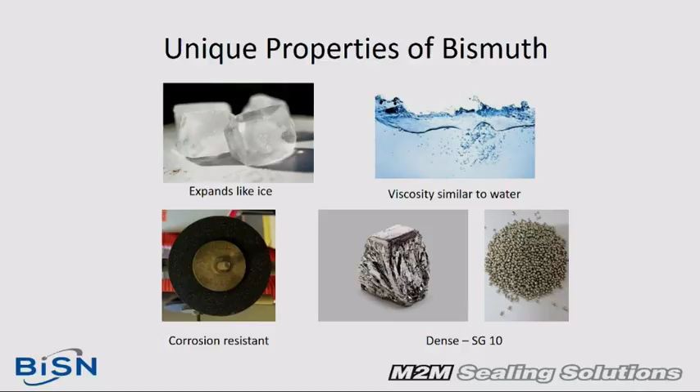So lastly, the biggest thing that makes it a good sealant downhole is it actually expands, unlike any other metal, when it solidifies. So if you think of water, when you put it in a freezer and the expansion of it, that's what creates a gas-tight metal-to-metal seal in the well. We take it downhole, we melt it, we control how it melts, where it melts, and then allow it to solidify and expand and capture that expansion to get a gas-tight seal.

So the idea of using bismuth is not new. Actually, the Schlumberger brothers in the 1930s applied for a patent to use bismuth for all the qualities I've just explained to you. What they were doing that did not quite work, and why everybody over the last 80 years has been unsuccessful doing so, is they were trying to use electrical heaters. Electrical heat does not generate enough heat to get it to melt, to flow in the well, to solidify, and to control that process in order to get the expansion you need in order to seal.

So we use a chemical reaction thermite heater, which is non-explosive. Again, it's run on electric line. You can run it in, and it takes 240 volts, 60 milliamps, just like a wireline set bridge plug or perforating gun. So no special requirements required.

All thermite is, if you're not familiar, is iron oxide, aluminum powder. So again, non-explosive, can be transported anywhere in the world via DHL, anywhere else. The resultant product of that is aluminum oxide, a liquid iron that turns solid, and then extreme amounts of heat. Again, we use that heat in order to start the melting of the bismuth and control the process.

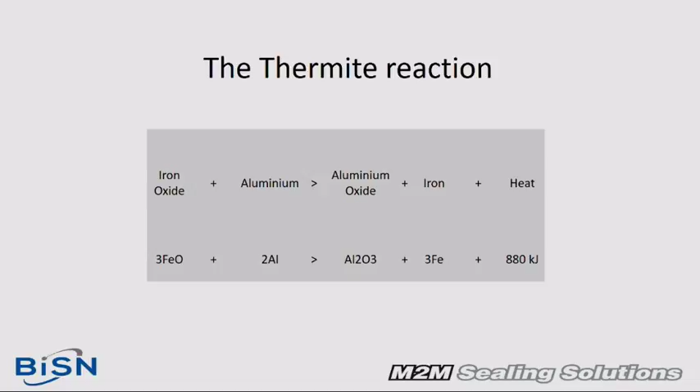So this is our Wel-lok M2M base technology. It can be utilized in many facets of the well in sealing, but what we use it for specifically in this is late life wells, trying to increase production in wells, and then decommissioning also, abandoning wells, trying to get a gas tight seal so that over the life of the well and after the well is done, you don't have to worry about going back and remediating the well.

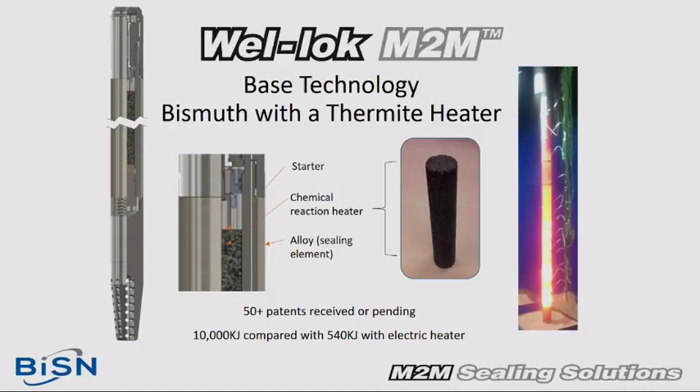So these are some of the tools that we do. Again, we have many products here that we've taken this technology and adapted to. For this specifically, we have the TS, which is essentially a Wel-lok bridge plug. So you take it downhole, you melt it, you create a gas tight seal. We have one that could be run inside tubing, run inside casing, depending on the size you need. It has a higher expansion ratio than conventional bridge plugs do. It has a higher pressure rating than your typical inflatable packer does, and it can be gas tested.

So we've gas tested these in week-long tests up to 5,000 PSI with helium. If you're familiar with helium, it's a very light element, and cement can't block helium, elastomers can't block helium, but ours, because of the expansion of the properties, will.

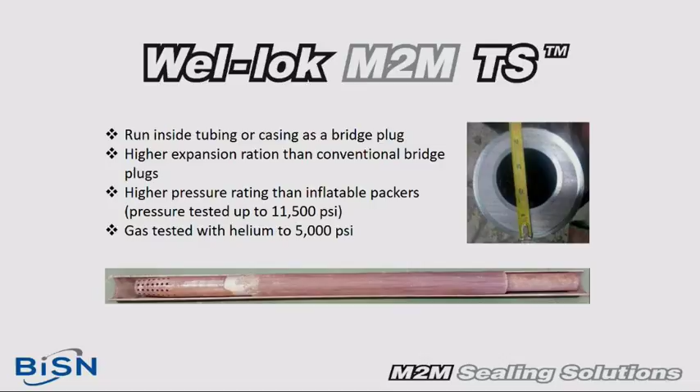This is a graph of a recent test we've set in offshore Norway. The scenario was they had a bridge plug and cement in the well. That blue line was a negative pressure test over a 2-day period where the well built up with gas pressure over 1,000 PSI, near 90 bar. The orange line was after they'd set our tool in the well, over the same 2-day period, and as you can see, no increase in pressure in the same scenario. That tool has been in the ground for 5 months now. They're doing a long-term study on it, and it's yet to build any gas pressure to date.

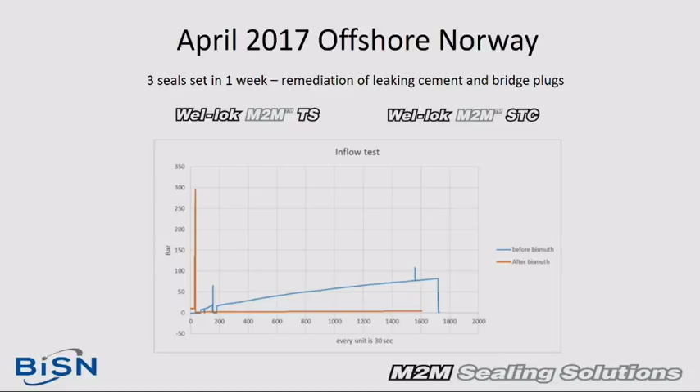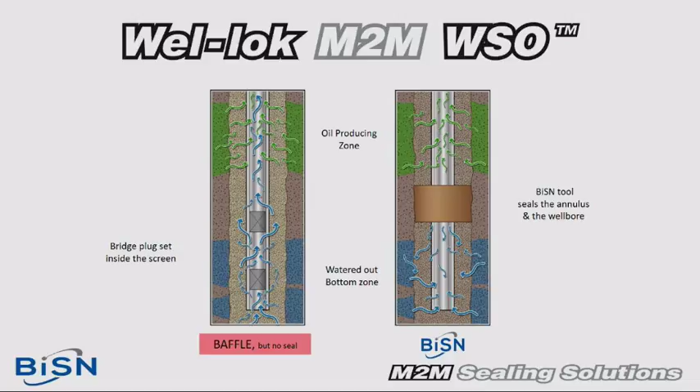As far as the late life of wells, trying to increase oil production, we were asked to look at this and see if we could shut off a water-producing lower zone of a well. On the left is the conventional method, setting bridge plugs inside the screens, baffling the flow, but not really stopping it from coming to surface. We were challenged to see if we could get our alloy to flow out the base pipe, out the screen, and then actually seal off the annular space as well, completely shutting off the flow of water from the zone rather than just baffling it.

Another one is our STC. This is something that can be run inside casing. It's basically replacing cement in the annulus to get a gas tight seal. So if you're looking at it as a balance plug, you can run this, perforate the casing or tubing as you would in a regular balance plug scenario, run in, melt the alloy, allow it to flow out the holes, and seal off both the tubing and the annular space.

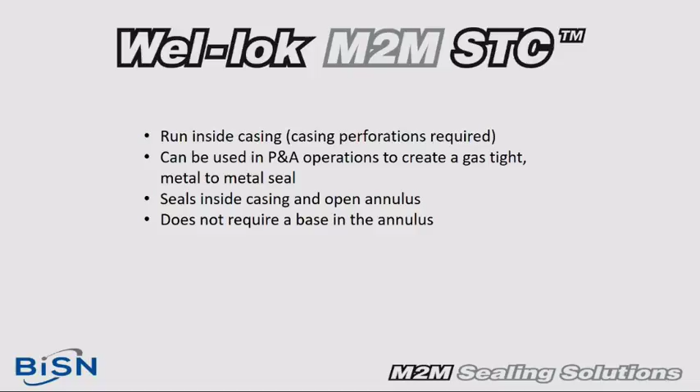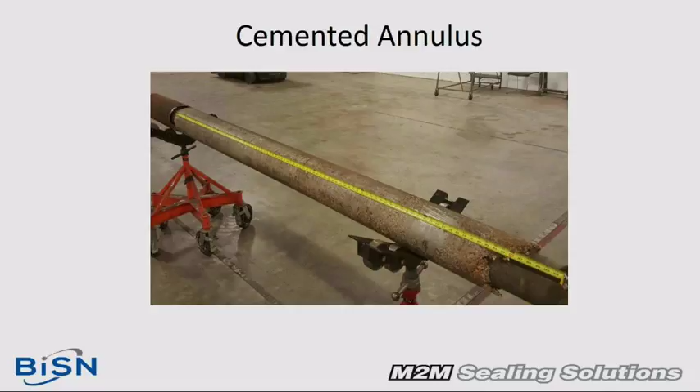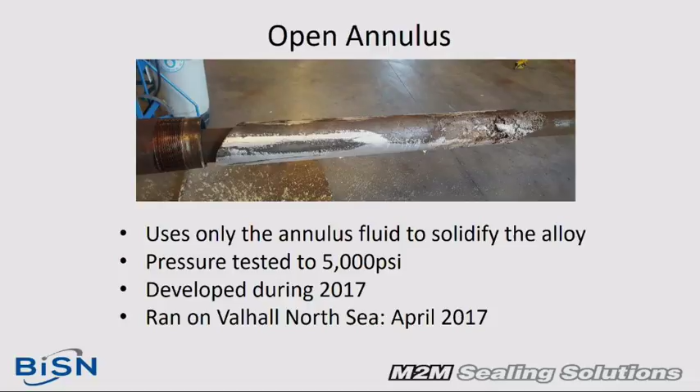This can be done in cemented annuli, as you see here, through microannuli and cement if you have sustained casing pressure in a cemented annulus. Or it can be done in a completely open annulus. On the right-hand side of that picture, that's where it forms its own base. Because it's a eutectic metal, it doesn't go through a gel phase, it goes from liquid to solid. As soon as it goes past its melting point, we capture that and ensure we have the right amount of heat with the wellbore fluid so it doesn't run down your well, giving you a solid seal. This particular one was also run back in April in the North Sea, and we pressure tested this one to 5,000 PSI. It was a 4.5 by 7-inch annulus.

And the final product I'm going to talk about is our MXD. This is for through tubing applications. You can run inside a small through tubing or restriction, and you can actually seal inside large annuli outside of the completion string, down in a lower casing.

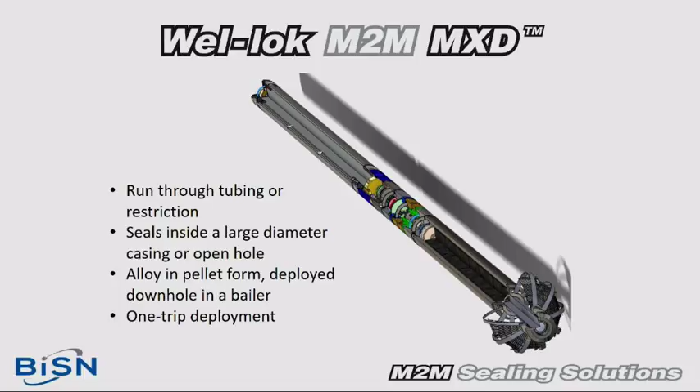We do this one a little bit differently. The other tools I talked about, we cast the alloy on the outside of our heater, run it in, and melt it. In this case, to get higher expansions and take more alloy down hole, we actually make it in a small shot pellet form. We carry it down in a bailer, run it down, open the bailer up, allow it to fall into our shot catcher at the bottom of our tool, and then activate the heater to create a seal.

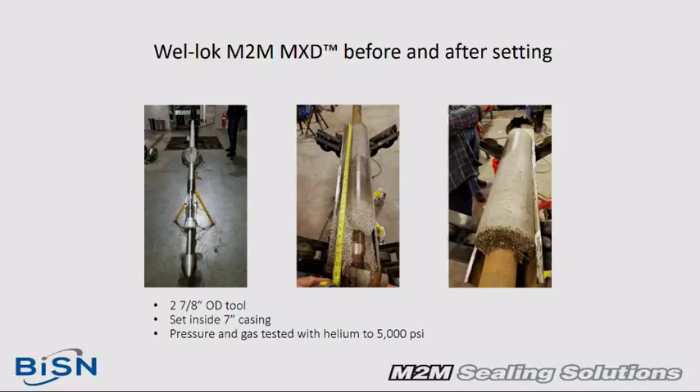This is an example of the first test we've done. This was a 2 7/8 OD tool. We set it inside of a 7-inch casing, and we achieved a 7,000 PSI hydro test and a 5,000 PSI test with gas.

Some new developments we're coming out with are larger sizes to handle larger well bores. We can actually take a 3.5-inch OD tool and seal inside of a 16-inch ID casing. We're also getting into removable heaters, which we ran our first test on today successfully. The reason for that is for basically NORSOK requirements, where you have to have a single material plug across all annuli.

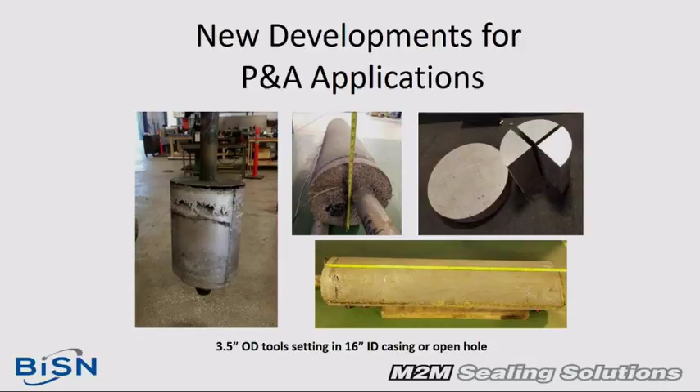And that is it. Any questions?

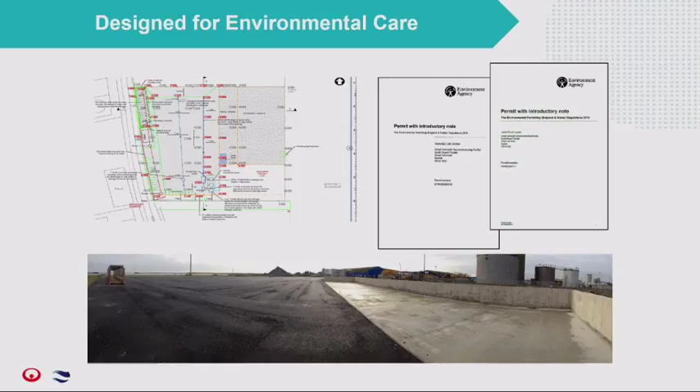We have the site completed at the end of 2016 together with Peel. In 2017 we had a stakeholder engagement where we invited, as well as the press, the local authorities and other companies within the Great Yarmouth or Norfolk area, because we're really focusing on using local content for the work we do. I'm going to take you to the project we did last summer together with Boskalis.

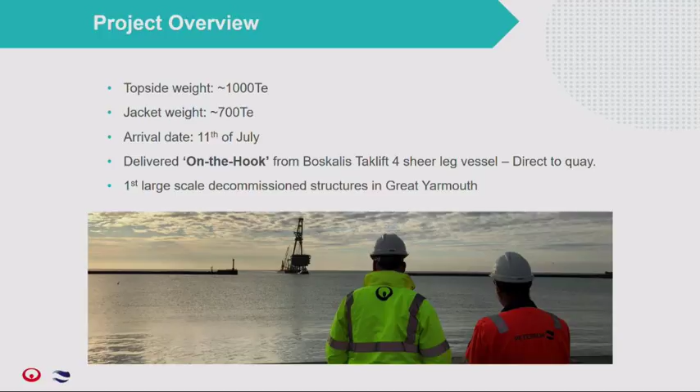This was a 1,000-ton topside and a 700-ton jacket. Arrival date for the topside was the 11th of July and the jacket about a month later. This is the first large-scale decommissioning project for Great Yarmouth, and it was delivered on the hook, direct to the quayside by the Boskalis Taklift 4. On the hook offers significant cost benefits because you remove the barge requirement, you remove the grillage requirement, you don't need to do sea fastening offshore, and you remove the barge loading onshore, which is a massive cost saving, but also you spend less hours offshore, so it's also a safer and a cheaper solution.

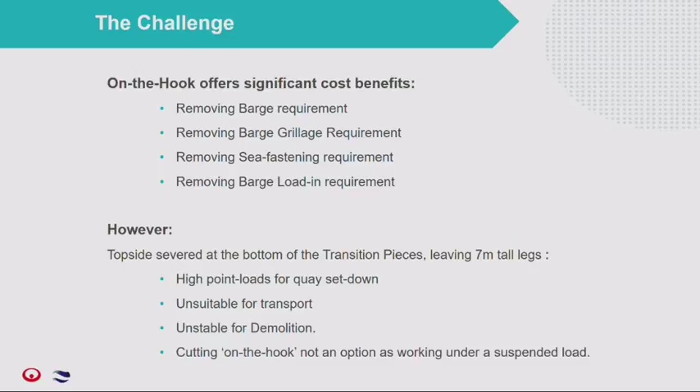There are a couple of points you need to take into account. The topsides are severed at the bottom of the transition pieces, which are 7-meter long tall legs. They have a high point load for the quayside, which is difficult to run with. It's unsuitable for transport onshore, and also unsuitable to do your demolition with during that. There's one safety issue: you can't cut the transition pieces on the hook because you then work under a suspended load, and that's a safety issue. So this is the challenge.

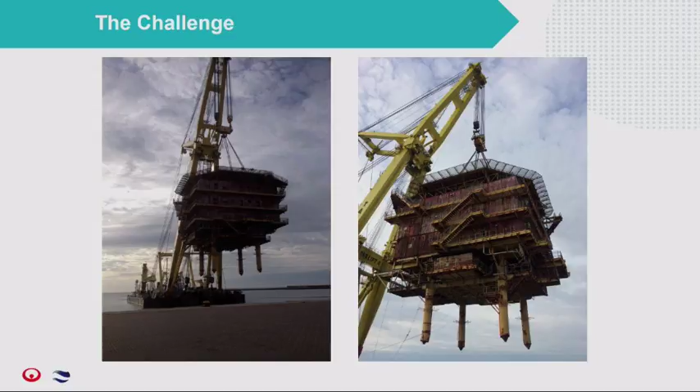The solution was to build a large level set-down tower to carry the load, a 1,000-ton load, and then cut the transition pieces from the top side. The challenges were the strength and the stability of the towers, the quayside loading spread. Also, there was a lot of camber on the quayside, not only this way, but also the other way around, so we really needed to level that. It's the structural strength of the topside itself.

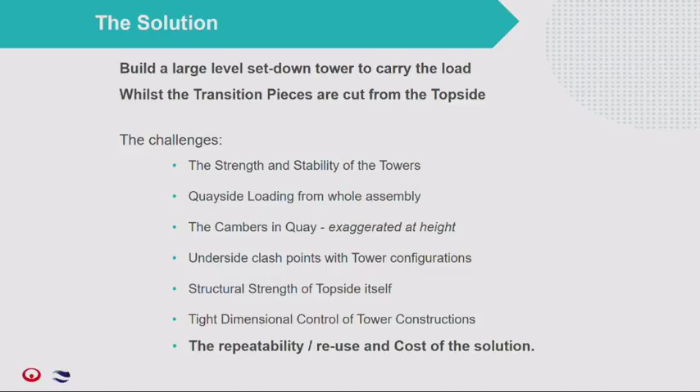But the most important thing was we needed to build something you can use repeatedly, because when you remove cost from offshore and add cost onshore, it doesn't make sense anyway. So this was our solution.

When you look at the picture, you see that it's modular built, and it's built from a decommissioned pipeline of the northern North Sea, which we transported from Lerwick up to Yarmouth. So this is really, when you talk about circular economy, this is circular economy. Local content, so local companies helped us cut the pipe in pieces and weld it with plates so that we can use it as a modular system, up to 7.5 meters.

Every block is 1.5 meters. So for all the next projects, we only need to know how long the transition pieces are, and we can use the system and build it fit for purpose for every project.

You see the layers. There is what we do with the load spread, and it is also how we fix the camber on the quayside so that it's leveled at 0%.

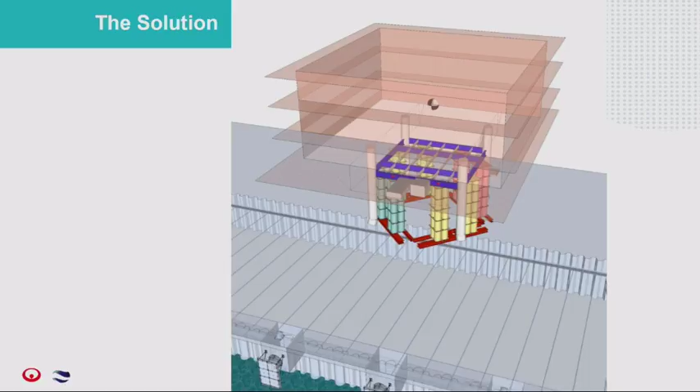Together with Boskalis, we had to do a lot of engineering from offshore. We have taken all the measurements from offshore so that we were able, we needed to know the center of gravity, the measurement, and where to place the towers.

Finally, we mounted grabs on our excavators, and we had some guys working from an extended platform with cutting torches, cutting the legs.

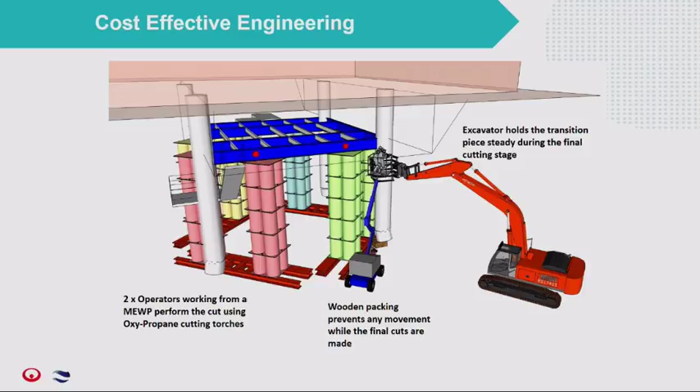So here is where you see the towers, and we don't paint them, because then you can see that it's circular economy.

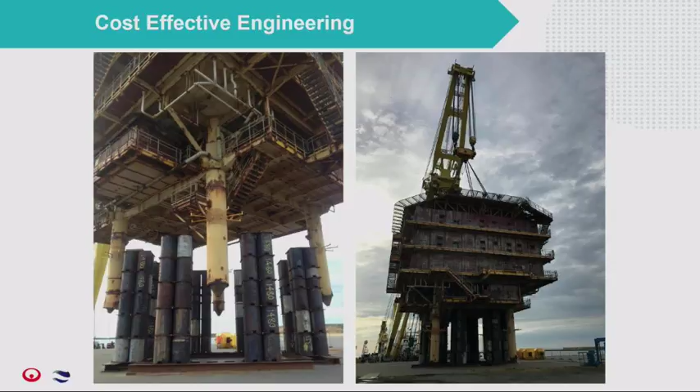And this is the cost-effective engineering. We just put it down, and when you see the small platform, it was only 2 centimeters from one of the pillars. So really the guys offshore and onshore did a lot of engineering work, and it worked out quite well.

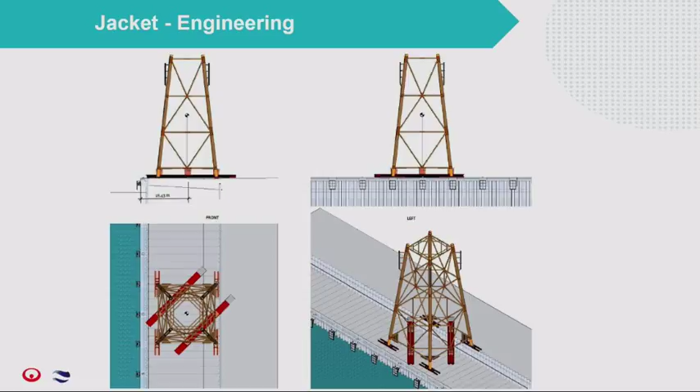We did the same with the jacket. We put it on the quayside and then moved it with our SPMTs to the decom pad, also using the modular system, but we only had to use one block. So with this, we think it's a faster, cheaper and safer solution, and it will unlock the potential for the UK Southern North Sea Centre of Excellence in Great Yarmouth.

That was 8 minutes not breathing.

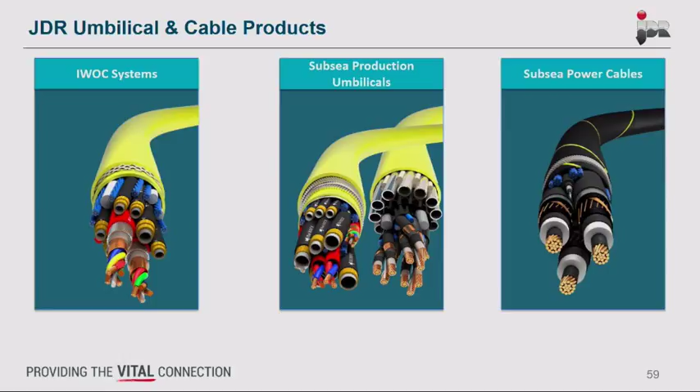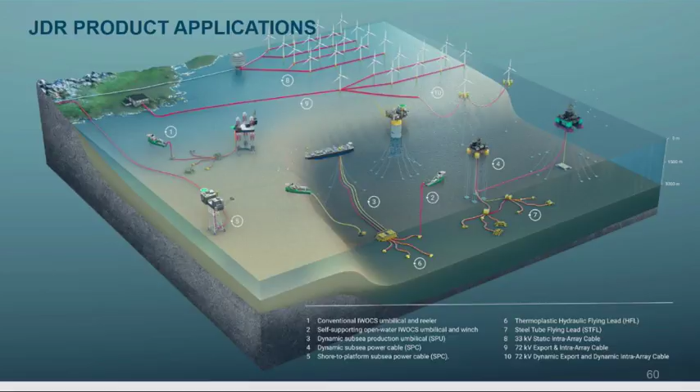So just a little bit about JDR before we talk about the project itself. We're a manufacturer of umbilical systems and power cable systems, so our roots are in the oil and gas industry, but today three-quarters of our turnover is actually in the offshore wind industry. Our products go from deep water, dynamic applications, up the continental shelf and into the shallow water where all the renewable activity is. As I was saying, our roots are in the deep water stuff, but more recently we've moved into the wind side. We have two factories in the UK, one in Littleport in Cambridgeshire, which was the original basis of the company, and the success of that facility enabled JDR to create a quayside facility in Hartlepool, which is now where a large proportion of our work is done. We also have a design office in Cambridge, which is where the product development group for the whole product range that JDR make is based.

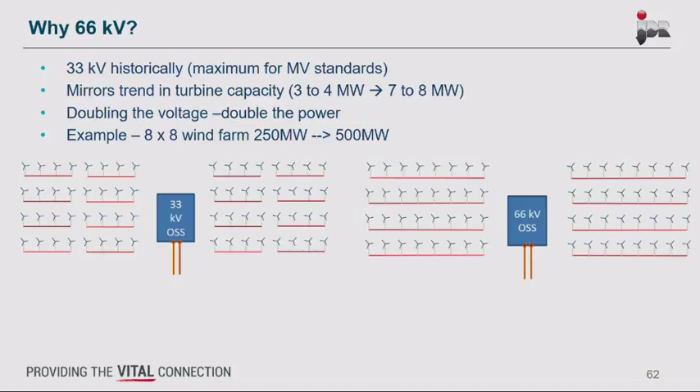So why 66 kV? Array cables have been 33 kV for many years now - it's the one thing that has been relatively standard. But as turbines have increased in size and the size of individual wind farms have increased, this has pushed a need for a greater level of voltage. If we look at the graphic on the left-hand side, this is a 64-turbine wind farm connected by 33 kV, and the right-hand side is by 66 kV. If I add in the cables connecting back to the offshore substation, you see that on the left-hand image there's a lot of length, and in the right-hand image we've reduced the number of cables right down. So this is really the primary economic driver of 66 kV - it reduces the length of array cables in a field between 20 and 30%, and simplifies the whole offshore substation layout.

But of course, 66 kV is a high voltage rating, not a medium voltage rating, so there's quite a lot of technology development required to step up the voltage. We didn't want to go to a very expensive, traditional high voltage mentality - we wanted to extend medium voltage technology up to high voltage, keep the cost down, keep the same manufacturing processes, avoid over-engineering, but at the same time we needed to demonstrate lifetime reliability through accelerated aging tests. So the design and development of this project was run from the JDR Cambridge office. Manufacturing was in Poland and the northeast of England, but there was good local content for the east of England too.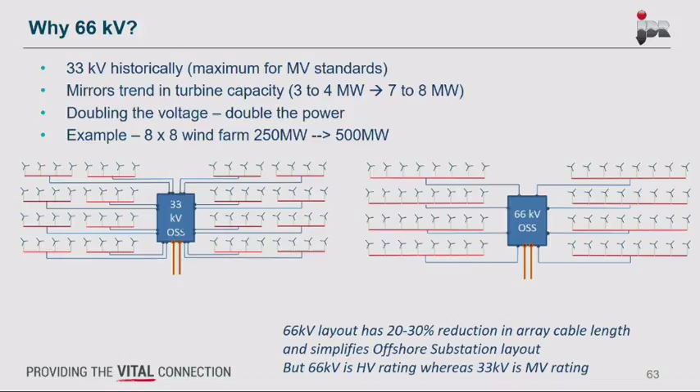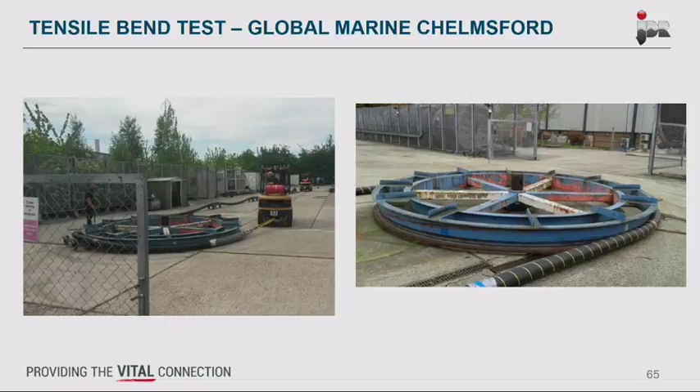Testing was completed in Chelmsford at Global Marine, the tensile test facility there. Another company who supported this is DNVGL out of Lowestoft, who coordinated third-party inspection throughout the whole process, both in the UK and in Poland. We also worked with the JDR Littleport facility, which was heavily involved in development.

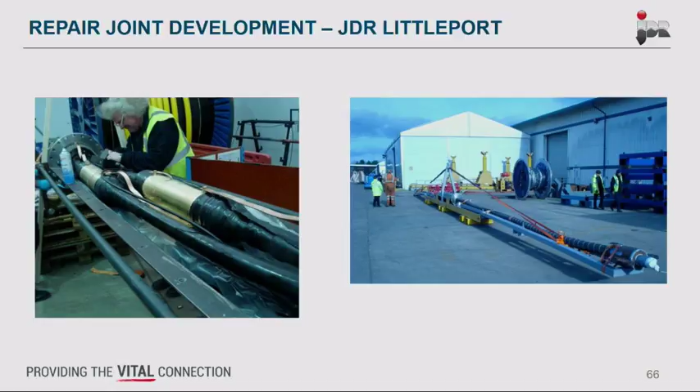Here we show a repair joint which was assembled and developed at JDR Littleport in Cambridgeshire, and the tensile testing for this item was done at Servitec in Lowestoft. Electrical testing was done up in Blyth in Northumberland, but that was again supported by some jointing technicians who came from this region.

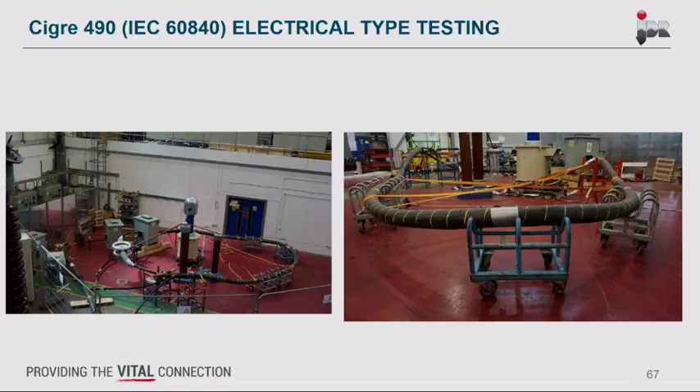Just as a few concluding points, we completed the technology development and full-size wet age testing last year. This has led to our first supply contract with Vattenfall on the Aberdeen Bay project. It's a relatively small project, but a very important one - the first 66 kV project for us. As I speak now, the first cable lengths have just completed factory acceptance testing.

The second supply contract has been the East Anglia 1 project, and you can't get much more local than that. That's a very significant, large project locally - 714 megawatts - and the production of those cables will be starting next year.

I should also add that the design is now ready and available for 66 kV floating wind projects. So this has been a great story of a successful development leading quickly into commercialization.

The local East of England content - the supply chain - has enabled this, and it will lead to future work both in and out of the region. So thank you for listening, and I hope that's been of interest.

Well done, you managed to do it within time as well. Congratulations. Judges, any questions? Hi, can you hear me?

Great presentation, thank you very much. Just a question - you talked about the things that were done locally. Can you give me a bit of a flavour of the kind of skill sets that you actually use from the local East Anglian market?

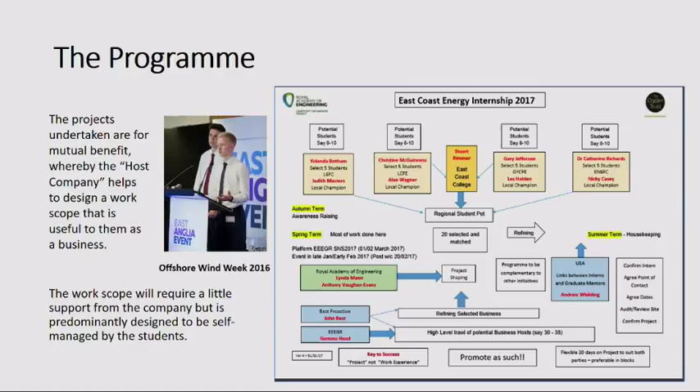The champions, which I think were really important in each of the colleges, two of which merged during the process, were the people and the interface with the students. Their intimate knowledge of their skills, what they wanted and where they were, was hugely helpful. I just went around and banged on doors, cajoled, challenged, was tenacious, and I found people that genuinely wanted to participate.

So we have the finances, we have the companies, and we are on our way to delivering an energy internship scheme. In year 1, we had 5 students. In year 2, we had 25, overall 30 students. Unfortunately, 3 didn't quite make the mark, but those 3 were individually mentored and talked with as an exit interview to try and understand where their challenges were. I do still think that a 90% success rate for a relatively new project is pretty impressive.

People always ask, well, what's the numbers? It's too expensive to train. Why should we train? Hang on. In 2017, at 20 days, that's 500 working days added through 25 students. If we took a broad salary of £20,000 and 20% on cost, we've added £50,000 into the industry over 2 months. If you considered that each of these students, in a way, was on an extended interview, it would cost you nearly £1,000 just to put an advert in the paper. So in round terms, I've said there's £75,000 worth of value added into the industry.

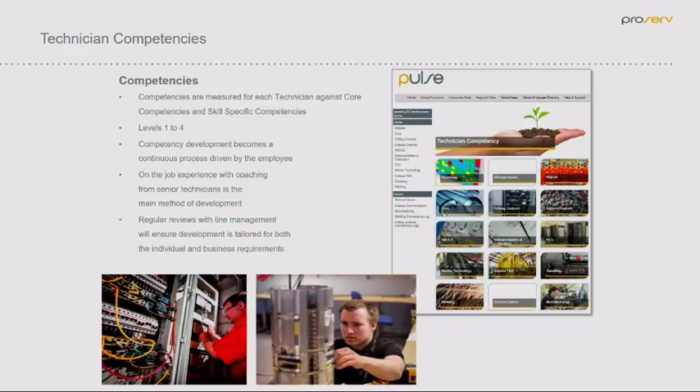They're able to monitor their own competencies. We set up this framework within the academy, and it's got all the tools there, with set levels where the guys can measure themselves and operate towards those levels, becoming competent in the skills that they know. So they know what they have, where they need to go, and how they can develop themselves. It's all part of them driving the process through.

This information is all open to them, so they can see what they have. This competency matrix has clear objectives, clear levels in which they can progress. Everybody works through this - not just our apprentices, but the entire workforce works through similar schemes. This one is for technician competency, but we do it in engineering as well, through several of these schemes.

When we get into engineering, we're not just looking for graduates. I'm a great believer that engineers can come in as great graduates, but also as people who have come from the shop floor, who have been offshore, who have had their hands on tools and really worked with this equipment through the apprenticeship schemes out of colleges, gaining their qualifications as they go to become engineers. So there are two routes into engineering - one very academic, and one very much vocational, based on the work people are actually doing on their tools with the products we're supplying.

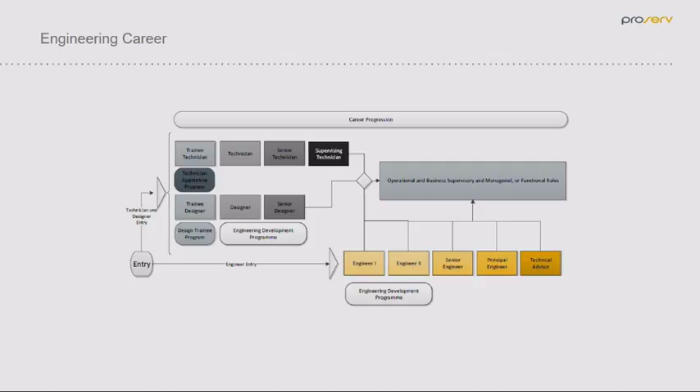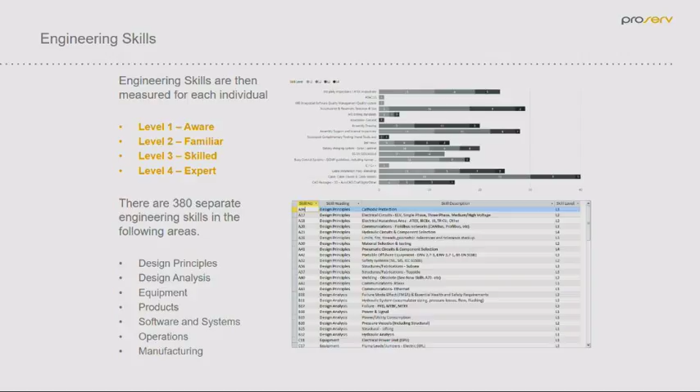With engineering, there are a huge number of skills and competencies which they gain. We're measuring the competencies again in engineering, and everybody can see this in these areas. They have a framework of competencies and skills where we're measuring nearly 400 different skill sets through a range of disciplines, so people can measure themselves, see how far they need to go to progress, and what they need to work to.

Finally, in leadership development - it's key for everybody who's working for us. We take this very locally, as a local passion, developing a local system within Great Yarmouth, where I'm based, looking not just at our leadership team but the whole group in what leadership skills we can bring to these people: coaching, regular performance reviews, and how we develop and bring them through to work within the group, mentoring people within their teams.

It's all about bringing people in at the base, developing them through the company, gaining their skills, giving them control of their own future and their own competencies, so they can clearly see how that's set out and how they can grow within the business and grow their skills for the industry.

So just a few highlights to finish with. Our apprenticeship scheme is well awarded, and we're really pleased about that. We've got a good share of the UK apprentices for Proserv in Great Yarmouth - 18 of over 50 apprentices currently working through their apprenticeship there. It's really great to see these young people develop through and work through the company, becoming engineers and leaders in their own right.

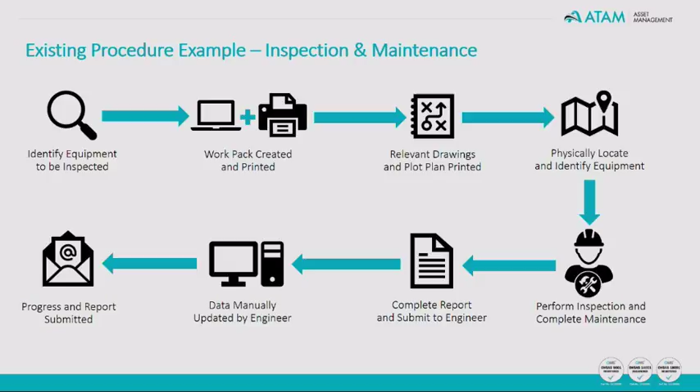The next slide represents the same procedure as previous, except this time utilizing our ATAM Asset Intelligence software. As you can see straight away, the number of steps has been greatly reduced. The work pack, instead of being printed, can be downloaded to the tablet. This can then guide the technician with the built-in GPS directly to the asset to be maintained. As the work is completed, information entered in the software, live field sign-offs, updates, and real-time reports are made instantly available.

These are instantly available and visible online around the world to supervisors, managers, and clients. The last step shown is automated, and the information is automatically shared via the cloud. This enables clients to see live status updates, productivity of their workforce, and real-time reports, allowing for total transparency.

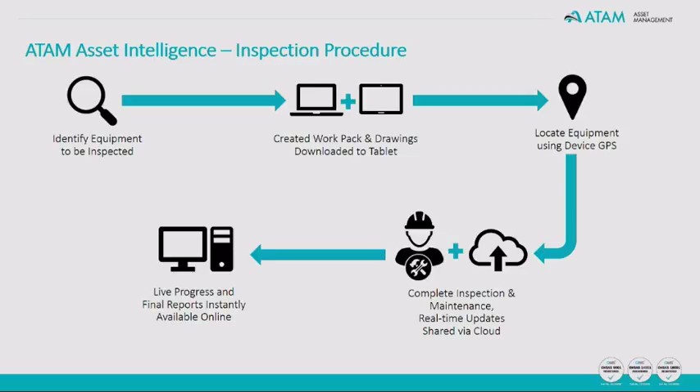We believe our solution offers the benefits we originally set out to achieve: increasing productivity, removing the repeated manual entry of information, and greatly reducing paper usage, which in turn saves cost and environmental impact. Further benefits can include reduced meeting times, streamlined handovers in the field, all whilst providing clients with live updates and a level of transparency never before offered.

Next, we come to the device feature. Some of you may be familiar. It's an intrinsically safe tablet, and this is what our software is designed to run on. It's fully certified IECEx Zone 1 and IP65 rated. It can be used onshore, offshore, and in hazardous environments.

Other features include the built-in camera and voice memos. These can be recorded and attached to reports as necessary to offer a greater level of detail. I'm sure anyone who has worked in a hazardous environment before and required photos to be taken can attest to the fact that it could be a lengthy process with the requirement for permits. This alone can save a great deal of time in the field.

And then also mentioned is the built-in GPS. Not only can you locate assets, it can also be used in emergency situations to locate the operators.

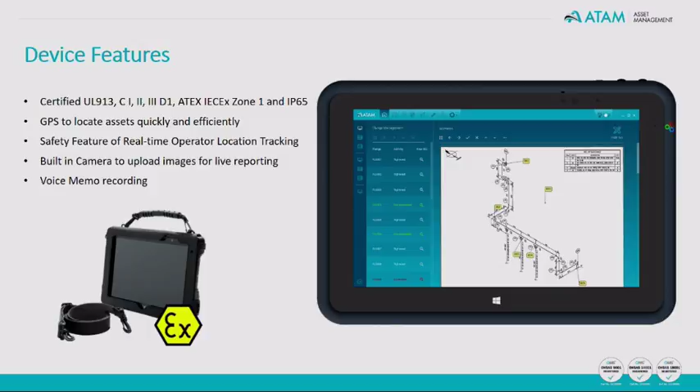So should you lose connectivity, all the packs and drawings can be downloaded to the device. For example, if you're offshore on a rig with no Wi-Fi coverage, you can complete the work. When you go for a coffee or back inside accommodation, you can connect to the Wi-Fi and synchronize all the documentation. Also, another key benefit is that drawings, P&ID, isometrics can be downloaded to the tablet.

These are then viewable at any point, saving people in the field a great deal of time as opposed to printing off hard copies. And lastly, a key feature for clients is our software is ERP agnostic.

It means data can be exported, transformed, and loaded into all major ERP systems.

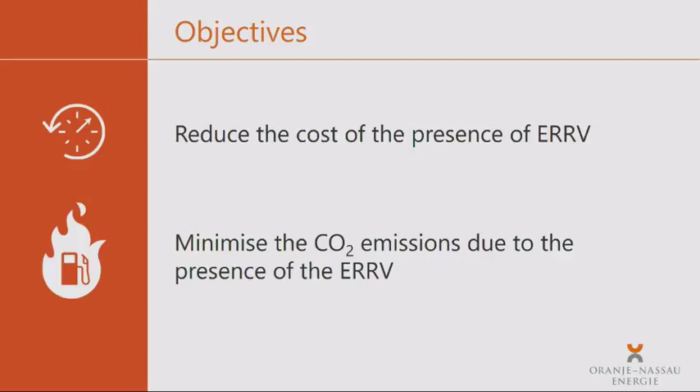First things, a little bit of a large brainstorm session in our office together with our UK partners and the NL team.

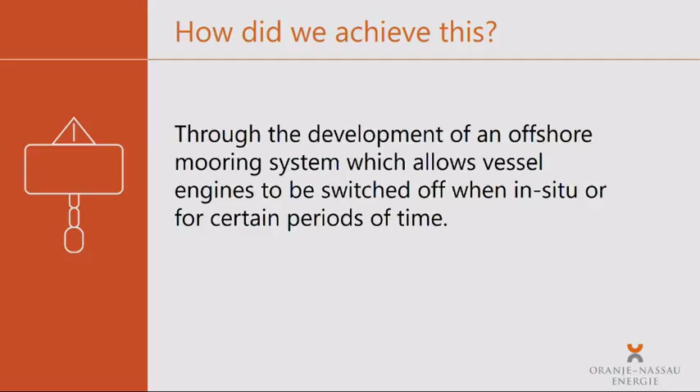At one point it was, why can't we just moor it? It sounds very simple, everybody said yeah, nobody ever thought about that. Why can't we just put an anchor out? Well, that's a little bit difficult in the middle of the North Sea, especially with the moving around. So, okay, let's put a mooring buoy in there. How hard can it be? Well, that was a little bit more of a problem.

As you can see, first of all, it started with a lot of permitting. How can we achieve a mooring buoy in the middle of the North Sea? That was the planning and permitting thing before it was completed.

Immediately it came out, okay, mooring buoy, yeah, but then we need two, because of course we always need to be downwind and downstream of the assets that we want. Okay, well, double everything, two mooring buoys.

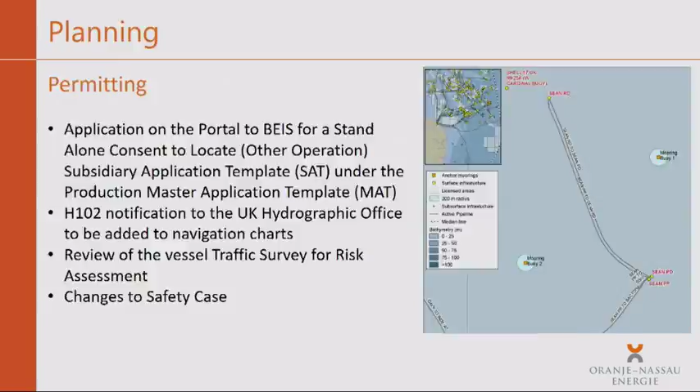How are we going to design it? It's the first time ever that somebody tried to put a standby vessel in the middle of the North Sea in different types of weather, basically on a buoy. How will it behave itself?

Let's do some simulation, a lot of simulation, and we're still in the after-test phase. We did the initial testing and everything else, but we are still testing the whole buoy system, also to see if we can optimize and even increase the operability of it.

Okay, that also done. Then thereafter, the Trinity House said, okay, yeah, very nice, large yellow big buoy, but can you put a light on it? Well, also done. So it has a nice light on it, even although it is a big standby vessel also moored there.

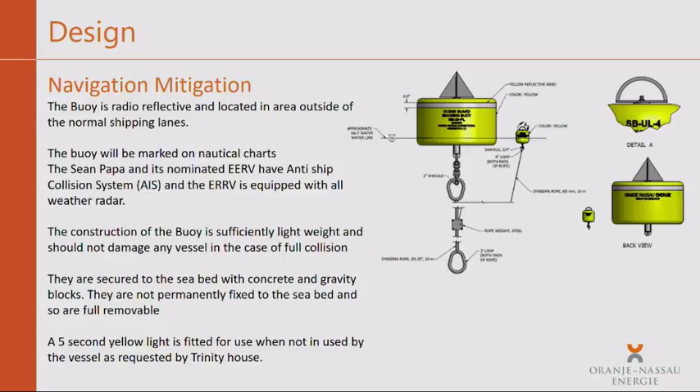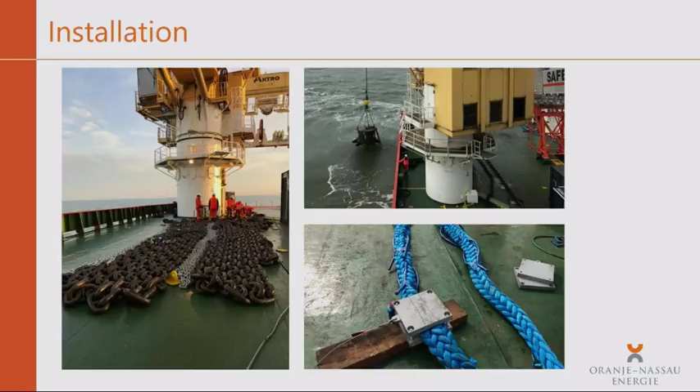Design was done. Next step was, how are we going to install it? Well, since it's the first one, and we probably over-designed it quite a bit because, well, it is the first one, and we want to be sure of everything, that was quite a large operation. Here you see some photos indeed from the chain and the block, the anchor block underneath, and the buoy itself with the small light. Unfortunately, not a light.

So, how is it innovation and how does it benefit us? Well, first of all, of course, it saves a lot of fuel and thereby a lot of CO2 emissions. The second one, it saves costs.

Our standby vessel supplier came back to us and said, well, if we're going to moor it, we did all the calculations, it won't need its main engines for about 70% of the time. We can give you a serious reduction in our day rate. Well, perfect, due to less maintenance, less damage on the engines, and the whole thing basically pays for itself in about 8 months. With a future field hopefully lasting at least 10 to 15 years, it's an easy win.

The other thing is, and that was a very major one, of course, is it still a standby vessel, and how fast, how well can it operate its daily tasks?

Yes, we did a lot of testing on there, even did some field trials, well, all the official field trials have been executed again, so that's 1 dummy in the water, 2 dummies in the water, 20 dummies in the water, and everything has to be rescued within the standby vessel within a certain time. All of those trials have been completed, and for now we have started using the mooring buoy operationally, I think since July, so it has been operational now for 3 months.

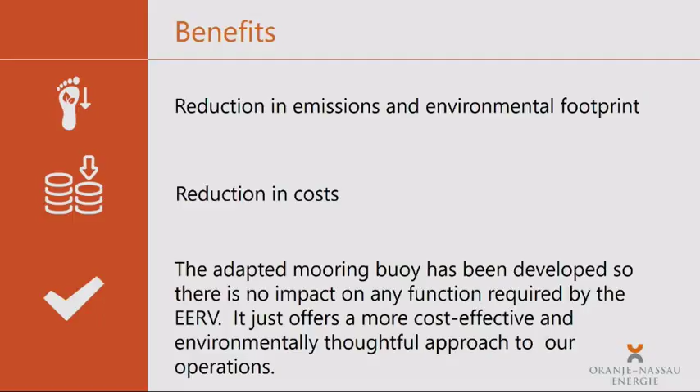Now we're going to talk, of course, about how is it innovative. It's simple, yes, but then again, the best ideas often are simple.

Nobody has ever thought about it, at least not in the North Sea and the southern North Sea. It is adaptable, it's open. We didn't patent it, so basically everybody who wants to use it, just contact us. We're more than free to open up all the data, and you can basically copy it as and when you want. It's not only for the oil industry, it's also for the wind industry. Put a mooring buoy in, and your Windcat or your suppliers can just moor on the buoy the moment they are not necessary, or when they are putting their people on board a windmill, and in the evening taking them off again. So that's why we think it is innovative.

The collaboration part will come a little bit later, but immediately, we didn't do it alone. We used a lot of our partners. Both, of course, the HSE, we had a lot of talks and discussions with them on how to do the trials and get it accepted, but also everybody in the engineering departments and third-party engineering firms, and Glomar, who is the standby vessel operator. A lot of people worked to make it happen.

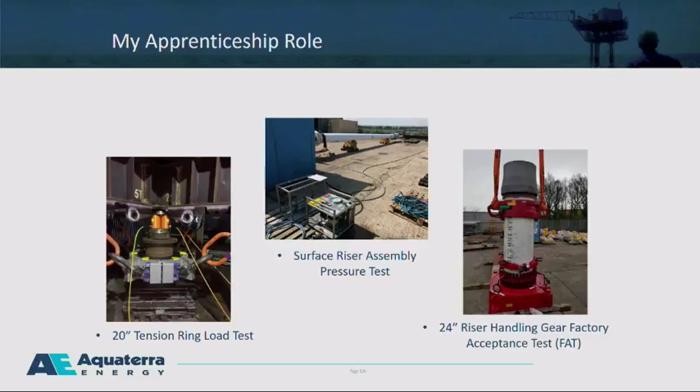Aquaterra currently has around 80 permanent employees. It is a friendly company to work for. Aquaterra often organises and participates in social and sports events. This year, I was part of the Dragon Boat racing competition, which we won.

I also played cricket for the Aquaterra team. During my first cricket match for the company, I actually managed to bowl out the managing director, who's on the judging panel, first ball of his innings. So I've lost a vote there, definitely. Luckily enough, he didn't send me my P45.

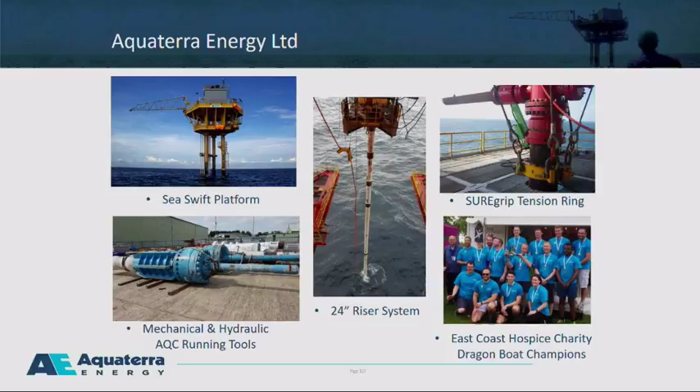In the industry, Aquaterra provide world-class, award-winning and bespoke offshore solutions. Some of our products include offshore structures such as Sea-Swift platforms, riser systems, hydraulic systems, and our service and rental departments, including tension rings, running tools, camera systems, and cold cutters.

When I first joined Aquaterra, the cold cutters were a piece of equipment which frustrated our offshore technicians. Due to them having many various mechanical components, the cutter suffered repeated issues during offshore operations, and in some cases caused downtime. A cold cutter is a piece of equipment used offshore to perform safe, quick, and clean cuts on casing. It's essentially a mobile machining product.

My initial interest and first-hand experience came when a cold cutter returned from a job offshore. On this particular job, the cutting process had taken over 5 hours and gone through 9 cutting blades.

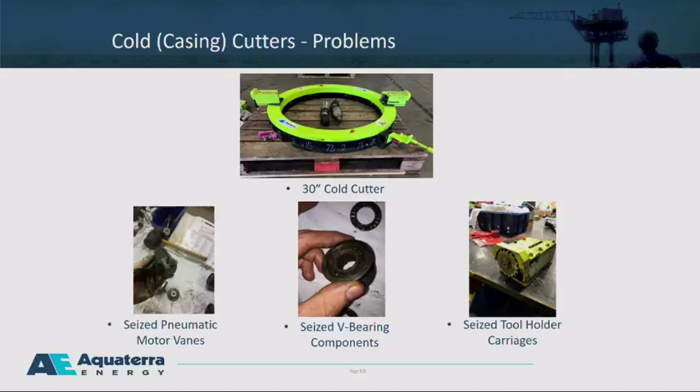It was evident that the cause for some of these issues and failing components on the cold cutting equipment was due to the harsh environment in which they work. I took personal responsibility to look into the reasons and failing components and how they could be prevented.

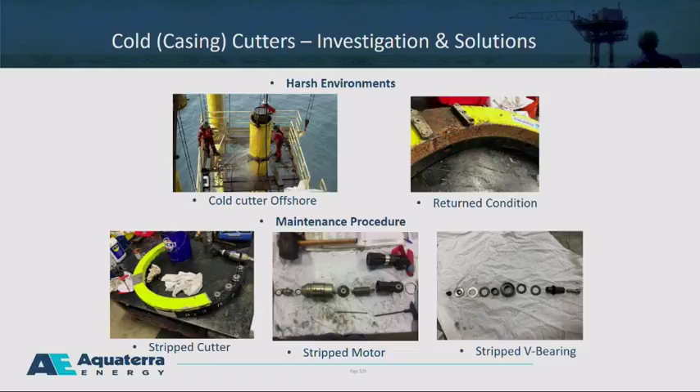I worked on producing a much more effective planned and preventative maintenance procedure which should be followed upon a cutter returning from offshore and before going offshore again. Part of this procedure included introducing an internal setup and functioning testing process.

I soon discovered that taking more time to efficiently set up the cutter would save a lot more time and lead to fewer issues when running them. This included performing a cut in the workshop whilst trying to replicate the offshore situation as closely as possible. The procedure includes, in detail, vital measurements, alignments and steps which need to be taken to ensure the setup is correct.

I used the challenge of the cold cutters as part of my job report in my NVQ Level 3, which is when I recorded the procedures.

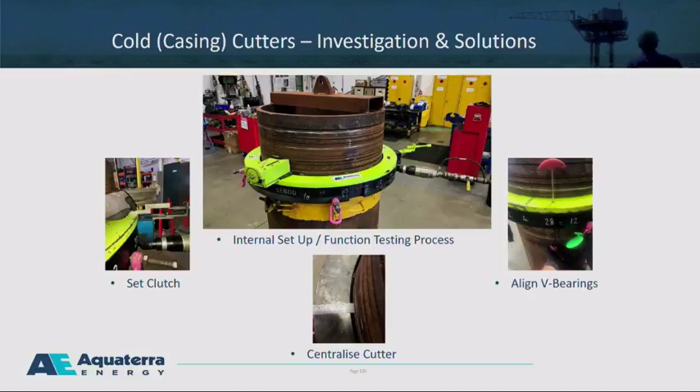Early this year, I followed these procedures when preparing a cutter for a project. The offshore technician came into the workshop to go through the setup process to ensure he was happy. Incidentally, this was the same technician who went on the job which took 5 hours, although the cut on this job only took 1.5 hours, a significant improvement on previous jobs.

This obviously resulted in saving the client time and money. I've also recently successfully completed a job which needed 6 cold cutters within 3 weeks. My line manager approached me and gave me personal responsibility for preparing these cutters physically within the time frame and completing all the relevant documentation that needed to be done prior to loadout.

As the next step in my personal development, I've undertaken offshore training with Aquaterra. I recently, last week, returned from a 12-day job in Norway, where a jack-up rig had skidded over a platform to begin the process of drilling new wells. Aquaterra were providing the conductor for these wells.

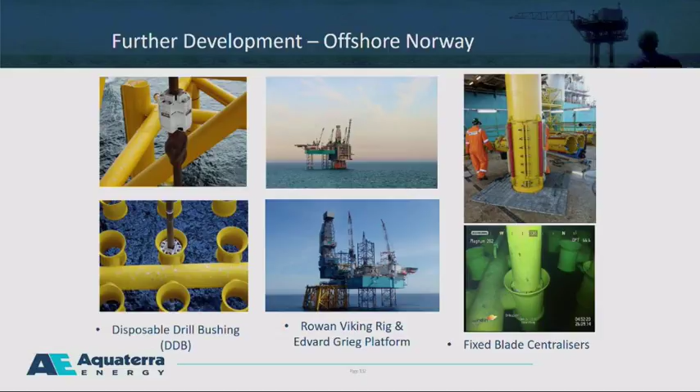The experience I gained included running disposable drill bushings and fitting stop collars and fixed blade centralizers to the conductor when it was being run. The standard of living and health and safety on the Norway job was exceptional.

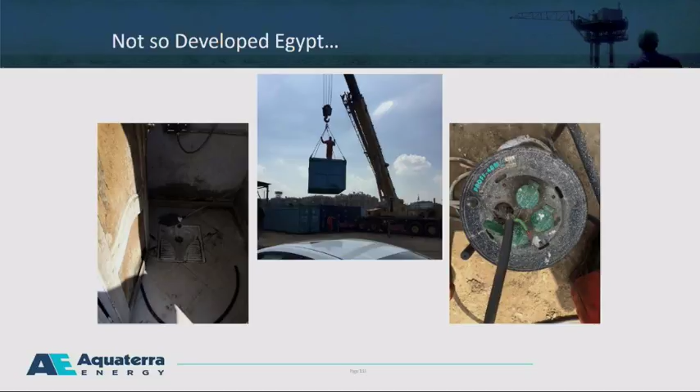My other offshore experience to date consisted of two trips to Egypt, which compared to Norway, as you can see from the photos, the standards in Egypt were not quite as developed. That is in the client's yard. Yeah, not pretty.

The work involved putting in a subsea riser system provided by Aquaterra and working in the client's yard carrying out maintenance on the backloaded equipment. I then returned to the country to run the riser system again. The skills I used on the job included operating the subsea connector hydraulic power unit, or HPU, along with the umbilical spooler.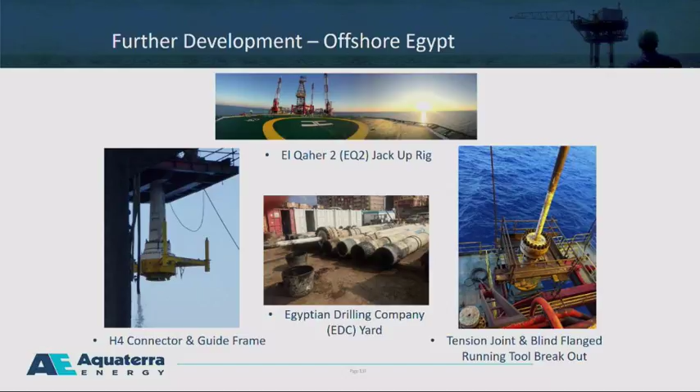The next step for me is to expand my knowledge of the oil and gas industry through the Opito learning modules and gain more offshore experience, eventually becoming an offshore technician for Aquaterra. I've already been granted partial funding by the ECITB to finish my foundation degree. I would then like to complete a full degree through the Open University, with the possibility of eventually moving into the project management side of the company.

Thank you very much for listening. Any questions?

Well done, Edward. Thank you. Judges, some questions, please. Thanks for a very comprehensive presentation there, Teddy. Very, very good, excellent. I think you've answered all the questions that I had, bar one.

What message would you give to youngsters considering starting an apprenticeship? Always push to learn more within what you do in industry, and always take opportunities to learn through college, whether it's to do with industry or not. You always want further development, thinking about the future. I don't need a degree right now for what I'm doing, but if I want to walk into project management or project engineering, then that's what you will need to go into an office job.

And we have another question, I think, from one of our judges. Has it turned out how you expected it to be when you started? And if not, why not?

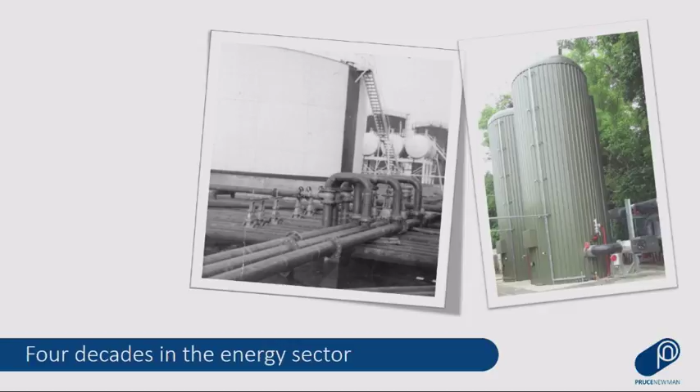Okay, I'm Graham Newman. I'm the Managing Director of Pruce Newman, and this is Daniel Lark, who until recently was employed as a project control apprentice. I say recently because he successfully completed his apprenticeship earlier in the year and is now working as a junior contracts engineer on a client site. Between us, we'd like to tell you about the benefits that Daniel has brought to our business, and a little bit more about Pruce Newman to begin with.

Pruce Newman is a second-generation family business which started in 1970 when my father, Brian Newman, and his business partner, John Pruce, set up their pipe-fitting business working at a fuel storage terminal in Essex and also in East London. Since their first projects in the energy sector, the business has gone from strength to strength, and we now employ over 120 people across the eastern region.

The character of the business may have changed in that time, but the characteristics of our people remain the same. We all take pride in doing a good job safely, and we work hard to keep our customers happy. I'm proud that our employees have a reputation for being able to pull rabbits out of the hat, and we look for that same work ethic in every new employee, whether they're an apprentice or a seasoned hand. I'm also proud of our approach to training and development. At Pruce Newman, we want to create a working environment where everyone can reach their potential, and this helps us to hire and keep hold of some very talented people.

Apprentices are a vital part of our HR strategy, and we normally take 2 or 3 apprentices each year. In 2015, to help develop our management capacity, we employed Daniel as one of the region's first project control apprentices. We already had a career path in mind for Daniel before he started with us. Our engineers follow a defined progression route within the business, which seems reasonably straightforward, but this simple straight-line progression hides the huge variety of work our engineers undertake and the broad range of skills they need.

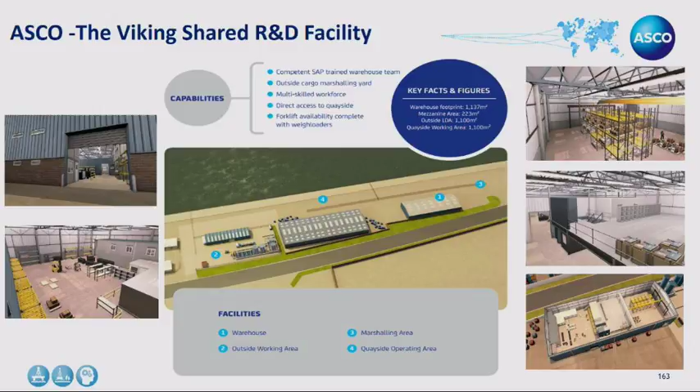So we've got a shared facility now in Great Yarmouth. What we've done is shifted ConocoPhillips from the whole to one side of the facility, making way for Centrica Storage, and we're partway through a transition period at the moment to make that happen.

In order to make this happen, we've not just had to engage collaboratively with the two operators, we've also had a number of key stakeholders, all of whom have had to be engaged, not just throughout the process but leading up to it, and they will still have to be engaged post-process as well. I've got a few points here where we've had to engage a lot of these stakeholders.

Health and safety, number one. We have to deliver health and safety within our services without compromising any of the obligations of both companies or anybody affected as a result of what we do.

Communication is really, really important. We need to keep clear lines of communication between the two clients and also the supply chain, bearing in mind we've got one supply chain in North Lincolnshire which will change to become a larger supply chain in Yarmouth and East Anglia. Time management is really, really important too.

Management of change. Change always happens - that's one thing that doesn't change. To ensure we manage change as it happens, operators are doing different things that maybe weren't viable a couple of months ago, so we have to embrace that change and put it into the plan.

There's an offshore impact - it's changing. Boats will be coming out of Great Yarmouth. Our first boat is due the 2nd of October into Great Yarmouth, whereas previously that would have gone out of Immingham. As you can understand, there's quite a significant amount of communication needed in that respect.